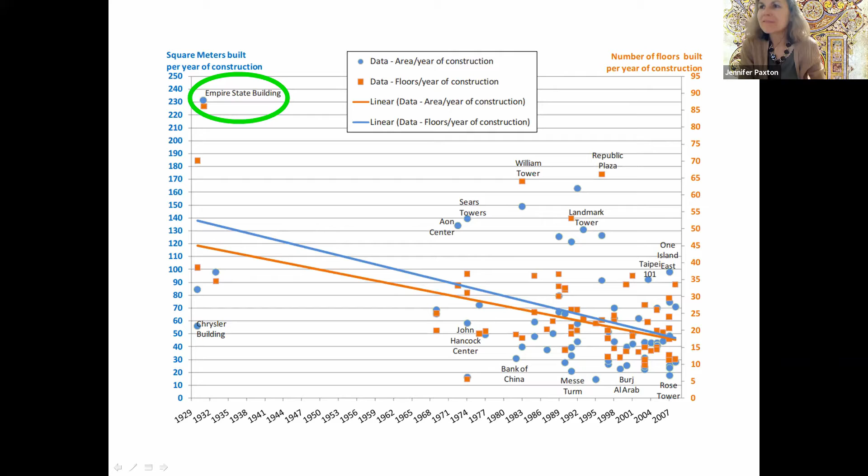I'm not sure. Well, think about this. They are taller, the height has grown, but the construction has slowed. It takes multiple years to build a building nowadays. So even though they are taller, overall their stats look slower if you divide it by a year. Does that make sense? Yep.

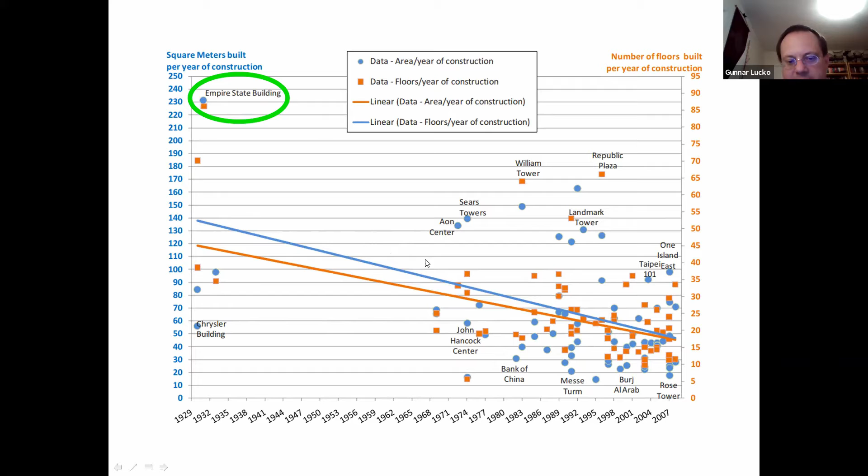And the trend doesn't look good. You see that the trend line here from the statistical regression these authors did actually goes down. So we have a real conundrum. We need to find what they did right for the Empire State Building, and how since then, not many skyscrapers in these decades, but ever since the late 60s, we've had a negative trend. Let's find out how this was done.

There's a wonderful book in my collection that you can buy, a notebook from the superintendent of the Empire State Building, describing how it was built. Here's some dates: it was built between 1929 and 1931. They started with demolition while they were still finishing their design. They broke ground in March of 1930, and finished 14 months later.

At peak, they had almost 3,500 workers on this site. This was basically employment for a good part of Lower Manhattan. They built 4.5 floors per week.

4.5 floors per week, how did they do that? Well, this was a structural steel skeleton, so you literally bolt and rivet it together like a gigantic Lego puzzle. Nowadays you can be glad with concrete if you get to 1 floor per week, which is the average weekly cycle I hear when I talk with construction companies, such as in the Northern Virginia suburbs where I live.

They built themselves their own little railroad to deliver the limestone cladding the exterior and bring all the other materials in. You see here how much material, in sheer volume and quantity, was delivered for that. So they planned, they built their own railroad to bring materials to site. They really made this an almost military-style logistics operation.

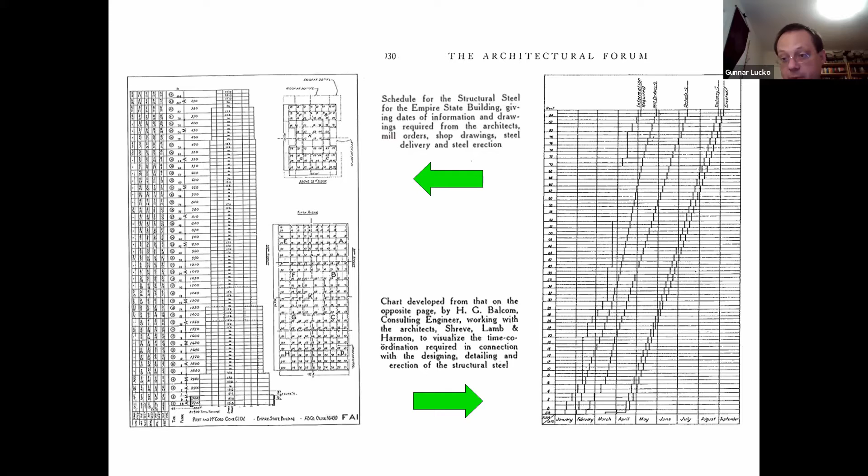I want you to think of a construction site in a completely new way after this video lecture. A construction site is a temporary factory in the field. And they did well at creating this temporary factory in the field, producing 4.5 floors a week.

So here's our first milestone thought: the sheer size of the Empire State Building shouldn't trick us into thinking it's a particularly complex building. Every floor is essentially similar to the one below, even though they taper, which makes things even faster as you go up. Maybe you can use some of the workers to fit out the lower floors. But size is not complexity. Just because something is big doesn't mean it's particularly complex to build. It just means there's a lot of repetition, and we can take advantage of that. Does that make sense to everybody?

Here's an even more impressive thing, from the same paper as the initial chart - I wish I had written this paper. The authors took that supervisor's notebook I showed you earlier and re-engineered what the full schedule would have been, because the architecture drawing simplified it and showed only the main production lines. This is the complete schedule. With minor modifications for excavation on the lower floors, the atrium, and other longer processes - since the street level and basement floors are so different from the rest - everything else runs at pretty much the exact same clip. This is the most detailed schedule we can get for the Empire State Building.

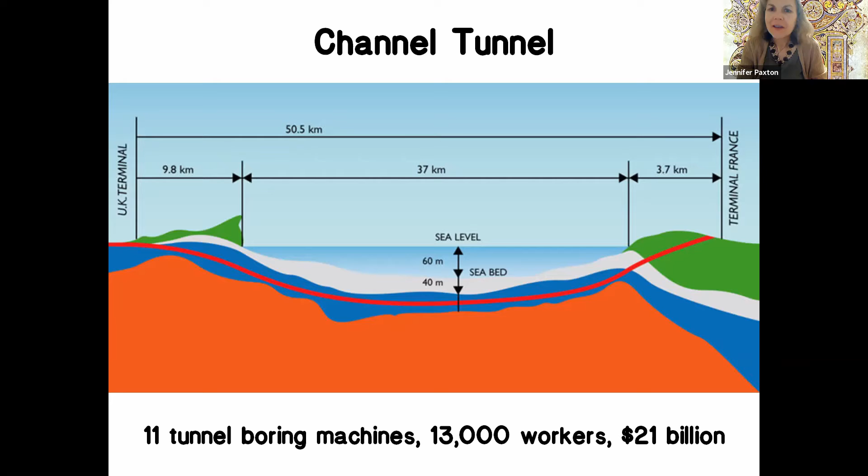Benjamin? Benjamin may not be with us. Oh, okay, he was here to set up at the beginning. Wait, is Benjamin a staff member? Yes. Okay, well, I just elevated him to a student, so sorry for that. I will call on other folks.

So this is the English channel, or the French channel, depending on which country you're in. On the left is Great Britain, and on the right is France and the European mainland. This channel tunnel is 37 kilometers, that is 25 miles or so, below the sea level off where the North Sea runs into the Atlantic Ocean, plus approach ramps that are several miles long. And you notice how they also had to go a bit deeper to be in a very stable rock formation and not be in sediment.

They used a total of 11 tunnel boring machines. According to what I've read, they had 13,000 workers—talk about mega projects—and the whole thing cost $21 billion. I think that's in current US dollars, but it doesn't really matter if it's 1990s US dollars or nowadays US dollars. It's a lot of money.

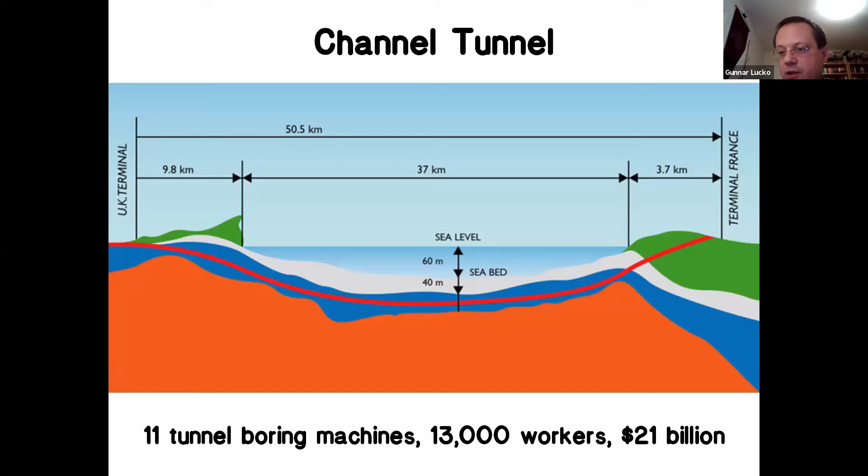Here's a thought I want to say. If you look at this channel tunnel, in general, building a tunnel is a really simple thing. You dig a very long hole, okay, that's really all you do. Any specific details are secondary to the overall thing of making progress with digging a hole. Some tunneling is actually a specialty within civil engineering, and there's a number of researchers that study tunnel building. Frankly, I find tunnel building a bit boring because it's basically just one thing. You dig a hole and you keep moving forward digging until you're done. I can think of more exciting work, but the project certainly is an exciting edifice in itself.

In fact, it's not just one tunnel. You will see that there's 2 tunnels plus a service and safety tunnel. Why service and safety? Well, first you have trains that go between Britain and France, and they go in both directions, single tracked, running north and south really, because the tunnel runs kind of northwest to southeast approximately to go across the channel.

And the service tunnel is for maintenance crews, and equally important, it has been used once or twice. If a tunnel fails, if there's a fire, if a train gets stuck, the passengers can escape into a separately ventilated service tunnel, because the worst thing that can happen in a tunnel, whether it's under a mountain or underwater, is fire, and smoke inhalation is the great danger. You see here that they also have ventilation systems that are able to move air to keep fresh air there for the occupants should they ever have to leave the train.

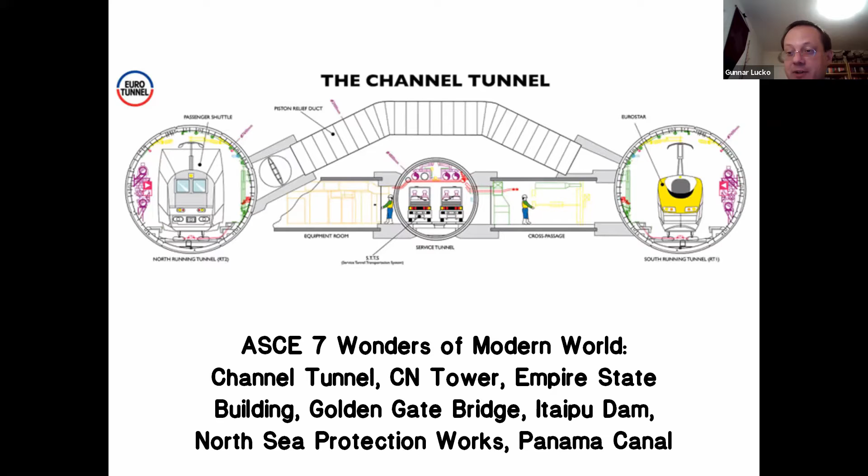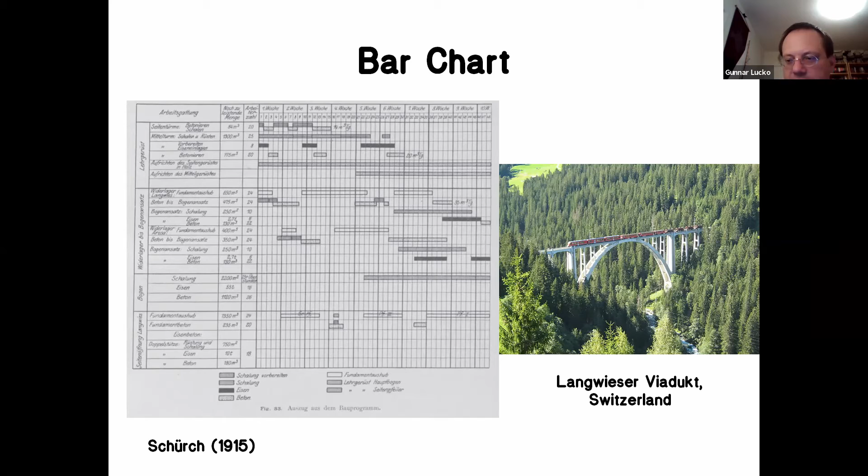That got me curious: where are construction schedules coming from to help us build stuff fast? The next one I found is from 1915, for the Langwieser Viaduct in Switzerland, this beautiful train bridge. They used the bar chart, not anywhere particularly fast, but it doesn't have a whole lot of repetition, so I just got interested in schedules in general. On the left, that's all German for build formwork, insert steel reinforcing, cast concrete, and things like that.

Next, in my detective journey, I took a look at how schedules developed since then. I'm trying to trace the story of how we came from a schedule as fast as the Empire State Building to now. Remember the declining slope? Well, one of the grandfathers of current construction schedules is this gentleman, James Kelley.

James Kelley is a mathematician who, after World War II, worked for one of the first private companies to have and use computers. Remington Rand and DuPont corporations put their heads together, and he worked with Dr. Mauchly, co-inventor of the electronic computer at Remington Rand, and later they made a sort of consulting firm.

Now, what did he create? Well, he created this. This holds a very special place near and dear in my heart. You might say, well, that's just some boring old magazine with some cryptic drawing on the cover, but I have this copy in my hands, not here on campus but in my desk drawer. It's one of my treasured scientific belongings. And you know why? It was Jim Kelley's.

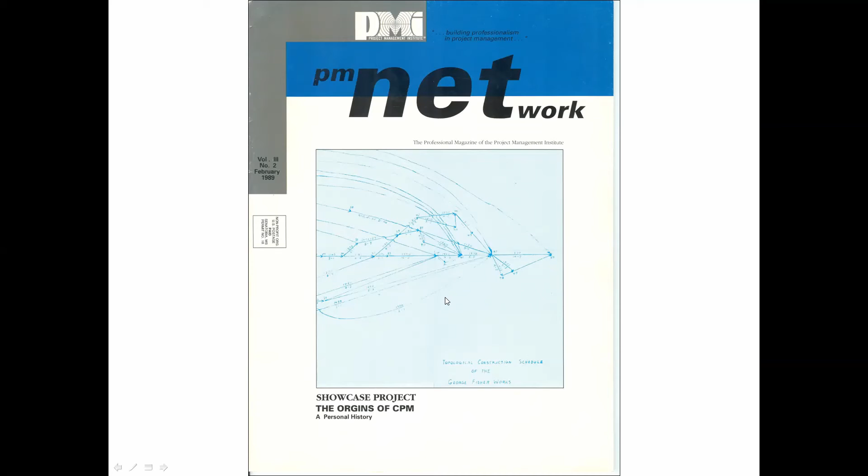Blueprints? Wallpaper. He told me, and he writes in this article, that they got themselves rolls of plain wallpaper, drew these things by hand, threw these rolls of wallpaper through the hallway, got down on their knees and drew these things. That's how current construction schedules emerged.

Who would have thought? So what do network schedules look like nowadays? This is a completely made-up mock schedule with a bunch of tasks. Construction professors love making tasks with random names, and since no textbook author is terribly creative, this example just uses alphabetic letters, because you could just come up with names like excavate, build the walls, build the roof. But this is simple—this is scheduling 101 as I teach it every fall.

You notice that some activities are green and some are red, right Jessica? If you look closely at the timings, you'll find some times where you have, let's see, 0, 1, 2, 6, plus 4, 10—these red numbers.

We don't have time to get into the theory right now, but what schedulers nowadays distinguish—that wasn't such a big deal before, because remember, all the old schedules were just a bunch of sloped lines very close together. What schedulers nowadays distinguish is they split schedules into two groups of activities. Critical activities are literally bumper to bumper—if any delay happens, the project will be delayed. Other activities have flexibility in their timing and can shift around without affecting things. So they color code them red and green. Does that make sense, Jessica? Okay, good.

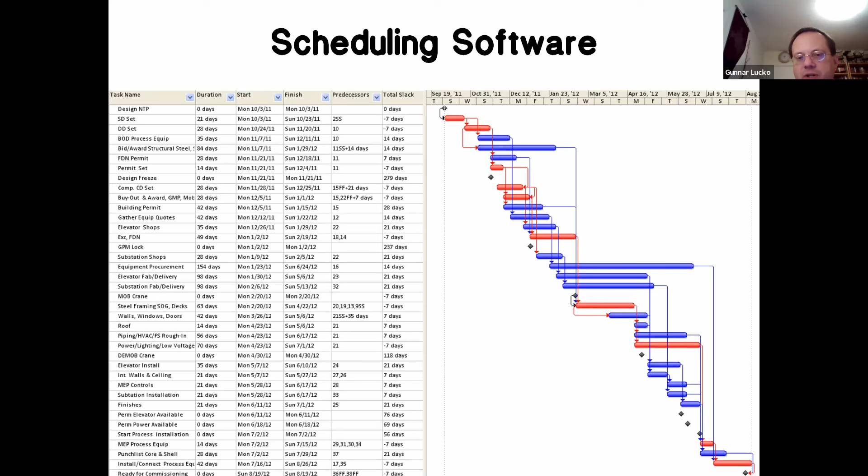But I think something is lost, because I really think that nowadays schedules give us more clutter and less big picture. And I'm starting to think that maybe that's a reason.

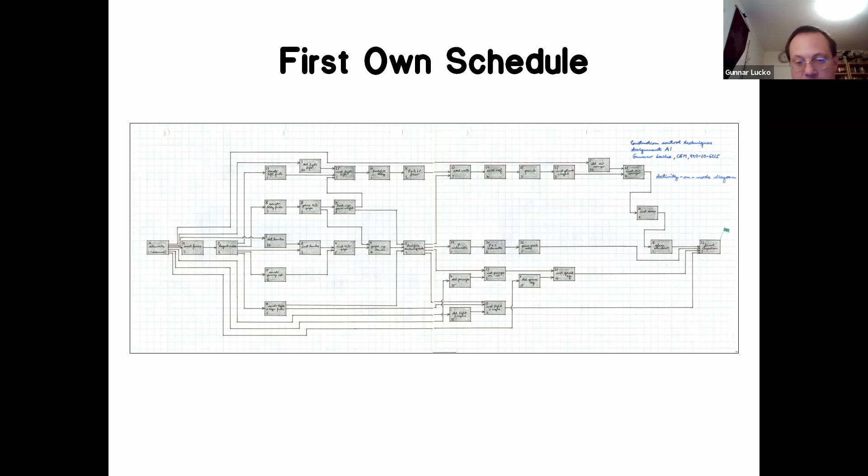Now, I've certainly trained myself in that. This is the first schedule I drew when I was precisely your age—I arrived in the US, took a scheduling lecture, and this is the first schedule I made. I'm very fond of grid paper, as most engineers are. So this is a network schedule, not on wallpaper, but close.

But here's the thing—it's all network schedules. There are only echoes nowadays of the linear and repetitive schedules that we saw for the Empire State Building and all that. And I think that is a real problem.

Here's where we currently stand. This is the book from which I learned, and I happen to know Jim Rowings—had him sign my book years after I learned from it. So this is the current state, although this book is now 20 years old. This is the current state of knowledge. You see the green circle thing there, Adam?

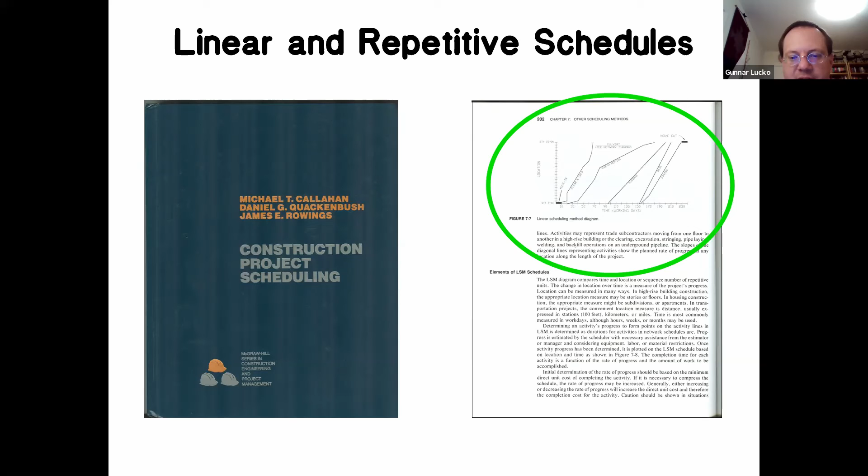That is pretty much all that we learn about linear and repetitive schedules now. I think there has been a real decline. There's no example like the Empire State Building anymore. The lines aren't really straight - it's sort of a hodgepodge project that shows how you could plot things, but it tells you barely anything on how to make stuff fast. I think that's a pity.

So I looked - were there any other things? I get curious, and we've talked about networks, which is currently the big thing, because that tells you which things are critical, so the project manager focuses mostly on them, and everything else is non-critical, so the project manager can ignore them for the time being, or just has enough fires to put out on a daily basis improvising life on a construction site as it is.

Well, there was this thing, line of balance. I will quickly show you how that looks. Line of balance is a technique that, funny enough, is older than network schedules.

It came out of World War II, out of the 1940s, and it was - Jenny, how would you pronounce this guy's name? George Fouch, I think. I have never figured out how to properly pronounce this guy's name. It's one of those names - Fouche? An American, maybe he pronounces it French? Who knows - Fouche, yeah.

So the funny story is he was sort of low to mid-level government, working at the Pentagon for the Department of Defense - that's why it fits so well in our story. During World War II he was involved in that, and later he was at the Goodyear Tire and Rubber Company, which still exists today, making race car tires and normal tires.

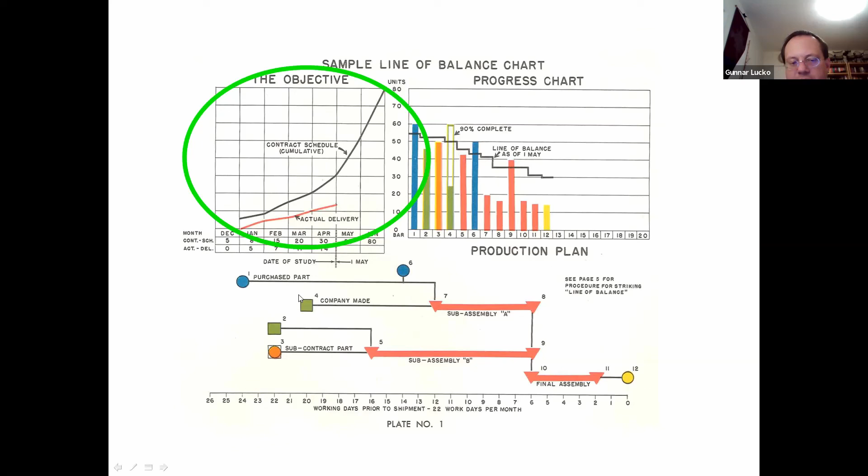Why are we behind on deliveries? Well, 10 and 11 seem to be slow. Is it 8 or 9? Oh, 9 is fine, it's 8. So it's this branch - is it 7 that's slow? Yes, it is. Well, is it 6 or 4? It's 4, 6 is fine. So, Sasha, in just a few moments, you see how we've identified that this inflow is a problem, and we need to focus our managerial attention on that.

Okay, so that's a pretty good thing of having production flow, and I don't think I've seen much of that before or after since.

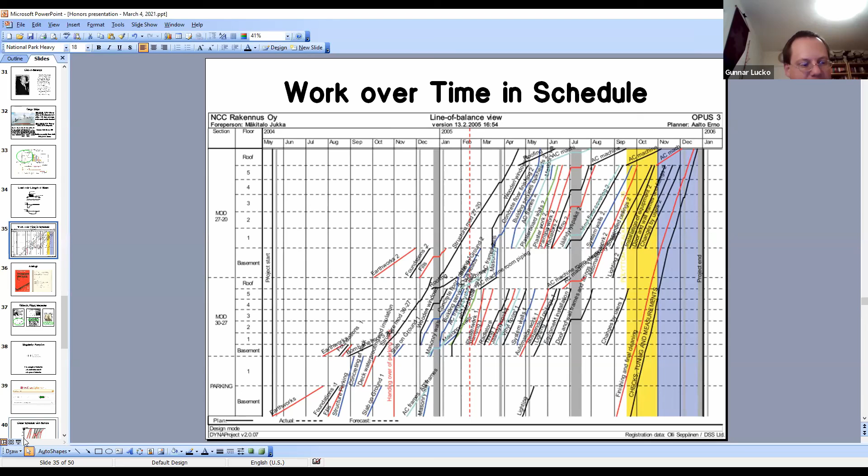So one could say I'm leading a bit of a resurgence, proposing that we should look at schedules like this, work over time, instead of these networks, which I find very confusing. There's a wonderful quote in the literature that says if these networks get too large... mind you, in construction projects a real project takes anywhere from 1 to 2 years.

Give you an example, Monroe Street Market. You all know Monroe Street Market, right across from campus, holding Potbelly, super important, and Barnes & Noble, still very important. That's your typical 5-story, 2-3 block, mixed-use development—commercial on the ground floor, residential on the upper floors—an inner city block, 2 years long, with 1,500 to 1,800 activities in a network schedule. That's a lot to coordinate.

I'm trying to slowly convince a contractor I'm working with from Monroe Market—if you have 1,800 of these things, you can't see them all. Here, everything similar gets lumped together and starts to trace trajectories, you see this, Nick? This could be dozens of tasks you're doing, but they all trace a trajectory. So this is literally an entire schedule for an entire project, 2-3 years long, on one page.

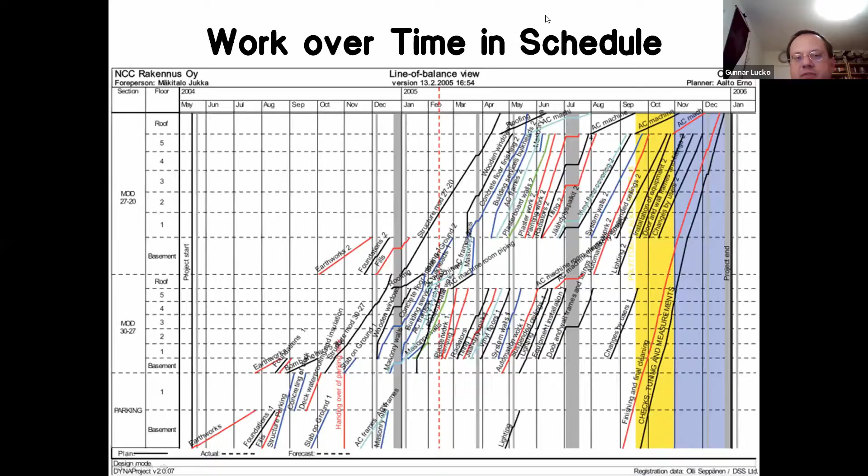I think there's great value in seeing the big picture, and my current research strongly focuses on my proposition that we're focusing way too much on the details and not enough on the big picture. In the interest of time, I'm going to skip my research slides—I got too excited with the grand story, and I'll cut out the more theoretical research lest I rob you of time and put you to sleep.

So I want to leave you with a couple of thoughts on how to build stuff fast—mind you, after you pack your towel for the Hitchhiker's Guide to the Galaxy. If you don't get that cultural reference, go read Douglas Adams.

So what have we learned? Size is not necessarily complexity. What matters is finding the repetition and focusing on the overall goal of all that repetition—details come second. This is the same message in a different costume. Details matter; I'm a very detail-oriented person by nature, and engineers are too. But as project planners, I'd say in general it's good to stay focused on the outcome while sweating the details at the same time—but in that order, not the other way around.